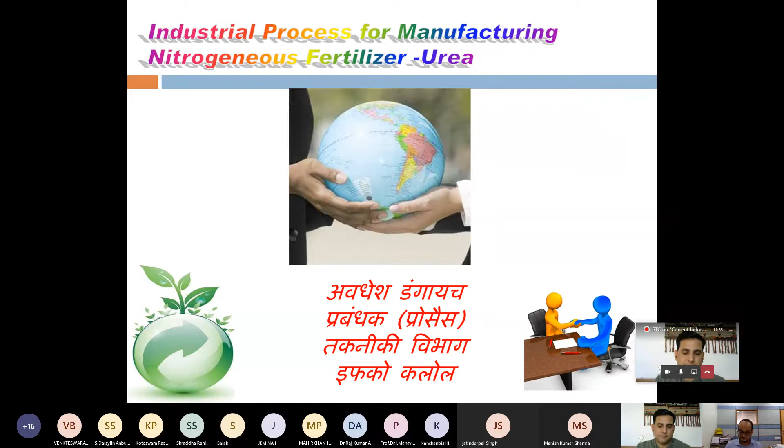The content of the presentation - I would like to give the general introduction of my industry. Once you are going to manufacture urea, you will get a buy-one-get-one chance - if I am going to tell you about manufacturing urea, I also have to tell you how to manufacture ammonia, because in the case of urea, everyone knows that 2 moles of NH3 react with CO2 to give urea plus a water mole. So for urea itself, my raw materials are CO2 and ammonia.

Now, where does the ammonia come from? In each and every urea plant, there is also an ammonia manufacturing plant. So before going to the urea plant, we have to talk about the ammonia plant also. So now I am going to the general introduction, then the manufacturing process of the ammonia plant, then the manufacturing process of the urea plant. Then I have to go for the major current status of the fertilizer industry - what is happening and what is the future of the fertilizer industry, especially in India.

So in our IFFCO, if we see the manufacturing units of IFFCO and joint ventures in India, there are 5 plants: 2 in Gujarat, 2 in Uttar Pradesh, and 1 in Odisha only. I am working in the Kalol plant, and Kandla, Phulpur, Aonla and Paradeep are also there.

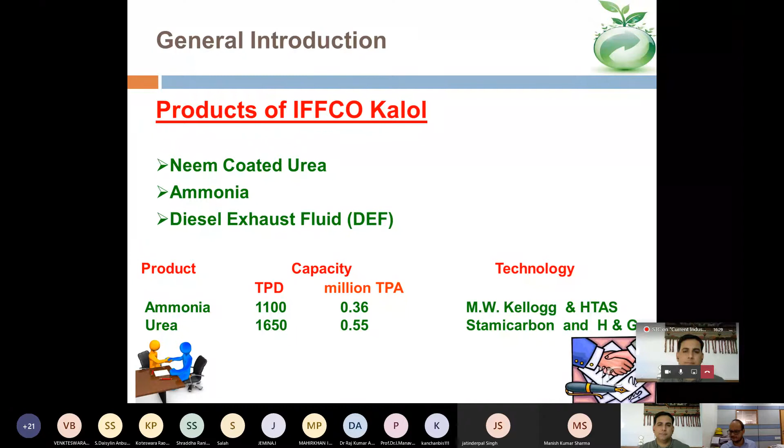The products of IFFCO Kalol plant are neem coated urea, ammonia, and just recently we have introduced diesel exhaust fluid, DEF. Our present capacity is 1100 and 1650, and the technology provider is MW Kellogg and Stamicarbon. So this much is only for my company profile, and now we are going to...

Mr. Avdesh, just to know, is this Kalol near Vadodara location? Yes, Vadodara only, it is near Ahmedabad only. Okay, in between Vadodara and Ahmedabad, right? No, in between you can say Mehsana and Ahmedabad. Okay, because I know Halol and Kalol are both in that area. Halol is different and Kalol is different. So you are located in Gujarat. Gujarat, yes sir. Okay, thank you sir.

So now we are going to tell about how we make ammonia only. Let me tell you this reaction from the 12th standard: nitrogen reacts with 3 hydrogen to give 2 moles of ammonia only. I am not going to tell you very much technology regarding this, but from the 12th standard if we see this reaction, and now discuss how it is manufactured, you will see that this simple reaction, how it is going to manufacture, is very good to see now. So by the reaction we can see that the raw materials which we require are nitrogen and hydrogen.

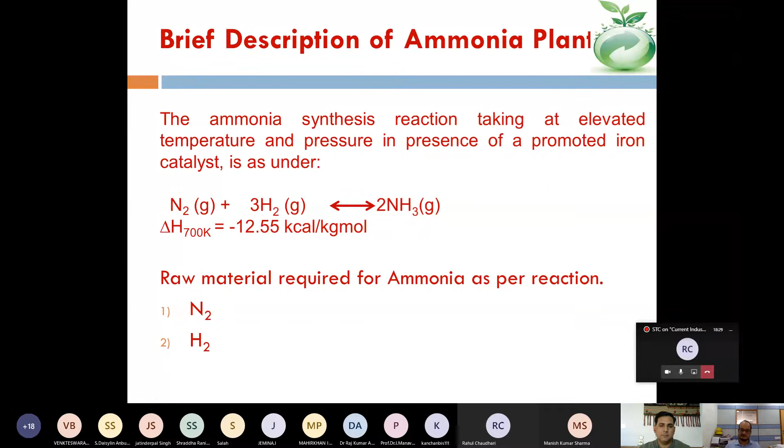Nitrogen and hydrogen. Before going to any raw material selection, because nitrogen and hydrogen both are the raw materials for my ammonia plant, ammonia only.

So first, what do I have to see? Cost of material. Anything we are going to make, the first thing that comes is the cost of the material. Our raw material should always be cheap. Material properties, form of the material, whether the material is toxic, and rules and regulations. Rules and regulations come in the government sector; there are many things which we have to import, and many rules and regulations such that we are not able to directly import some raw materials. But our overall motto is that whatever raw material we take, our cost of energy and cost of production should always be less.

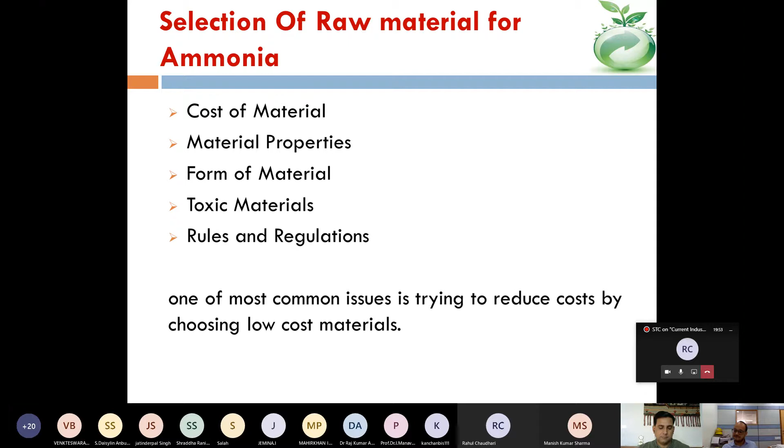That is our main motto before producing anything, before designing any plant, and before designing any process. Our main issue is how to reduce the cost of raw material and the cost of technology, so that our cost of production will reduce.

So while going for the raw material, we know that the source of nitrogen is air, since 79% by volume of air is nitrogen. And the source of hydrogen we consider as hydrocarbons - we can consider natural gas, naphtha, and coal.

Water, I have slightly struck out, because in the case of water we cannot directly utilize it, since breaking water into its two components, hydrogen and oxygen, is a very energy-intensive process. So we cannot use water directly, but indirectly we are using water also to produce hydrogen, which I would like to tell you later on.

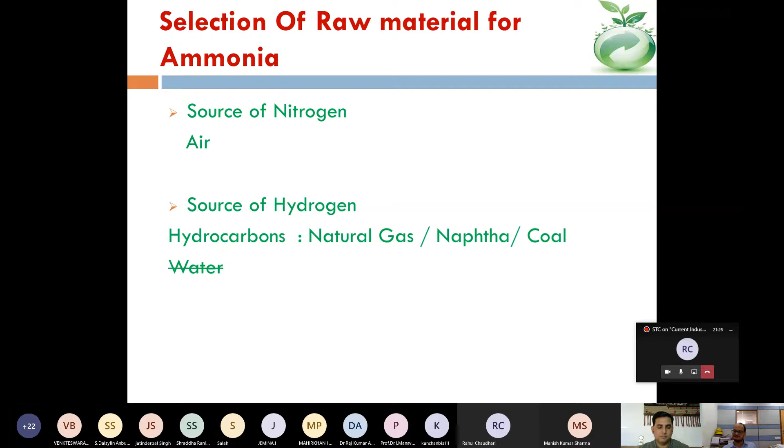So my source for nitrogen is air. For hydrogen, I am using hydrocarbons - natural gas, naphtha, and coal. At present we are utilizing natural gas. Previously we were using naphtha also, but later some regulations came from the government, and we have eliminated the naphtha section from our plant feed.

So the process for ammonia production - while we go to produce ammonia, there are 7 levels.

Can't we use direct hydrogen for this? Means like the hydrogen which is produced at chlor-alkali plant, caustic chloride plant. Can't we use that hydrogen directly? You can use direct hydrogen if you are getting it at a cheap rate, but the purity should be very good.

And the other thing is, while making urea, you also want the carbon component. For the carbon component, I use hydrocarbons only. But if I get CO2 from somewhere else also, then that is also good for me.

So before manufacturing ammonia, the following operations and processes are involved. First is desulfurizing of the natural gas and naphtha. Second is pre-reforming and reforming. Third is water gas shift reaction. Fourth is CO2 absorption and stripping. Fifth is methanation. Sixth is ammonia synthesis. And seventh is refrigeration. In between, so many utilities are there which I am not going to tell you about, because that process itself would be very big and become very lengthy.

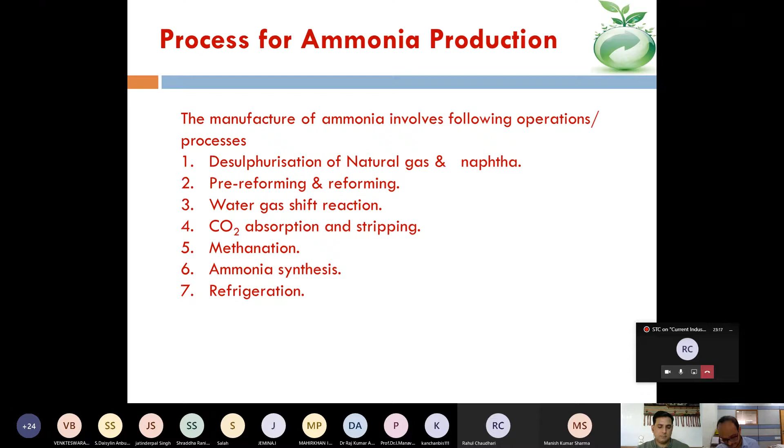Am I right, sir? Yeah, you are right. It was there actually, but unfortunately the speaker Nitin Mittal got corona positive, so he is taking rest. So at this place, Mr. Amit Verma from Dow Chemical will give the talk.

So there's a question from Aditya Matare - he wants to know, since we get nitrogen from air, is there any instrument in which air is brought and then some process is done to get the nitrogen? No, we can directly get it from there, because so much air is there, we just have to compress it.

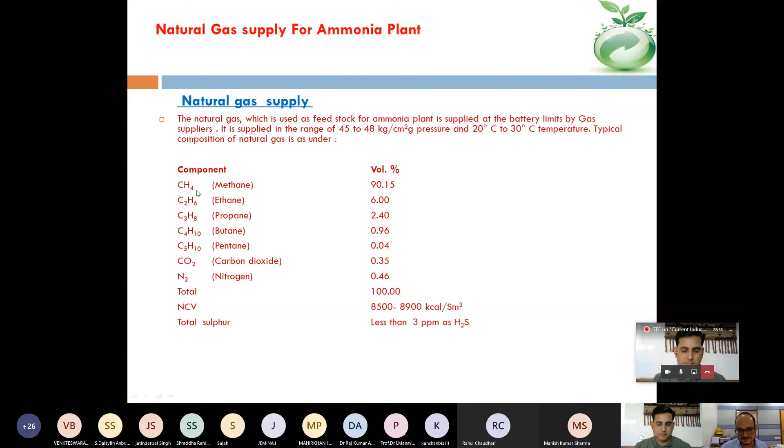So removing sulfur we call desulfurization, a process which employs absorption and adsorbent using activated carbon. There are two processes in the industry: one is activated carbon, and another is hot desulfurization by catalytic reactor, which uses SDS catalyst. The purpose is to remove sulfur from the process stream.

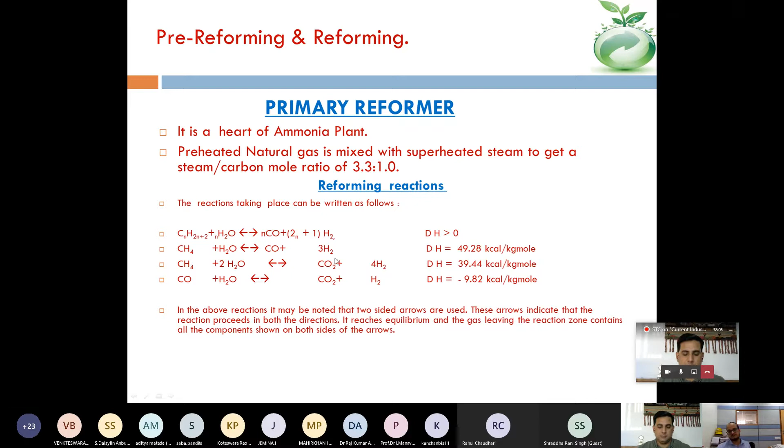In the above reaction, it may be noted that the two-sided arrow means both reactions will occur and can proceed. If this reaches equilibrium, the gas leaving the reaction zone contains all the components shown on both sides of the arrow. So what is our motto here? To get hydrogen and CO2. But in the case of CO2, we are getting CO also.

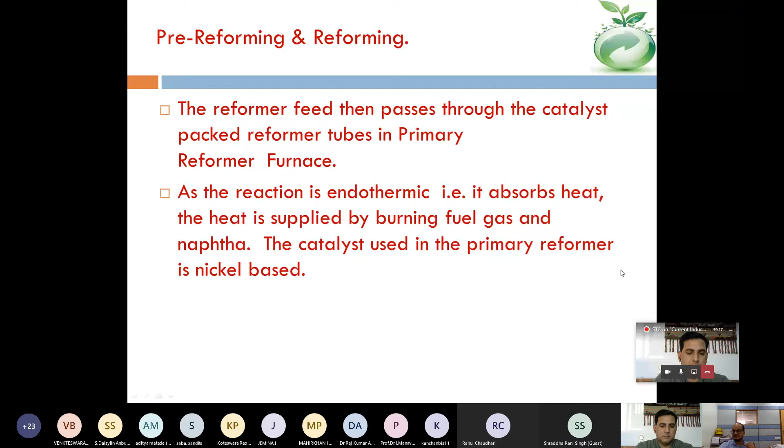The reformer feed then passes through the catalytic packed reactor, where the catalyst is a nickel-based catalyst, and this whole reformer is a furnace. In the reformer furnace, the temperature of the flue gas side, that is the furnace side, is around 1100 degrees centigrade. In the reformer tubes, in the reforming section, we enter this process stream at around 525 degrees centigrade, and since it is an endothermic reaction, it absorbs heat. After the reaction, when the process stream comes out from the primary reformer, the temperature is around 780 degrees centigrade. This reaction is endothermic, it absorbs heat, and that heat is supplied by burning fuel gases and naphtha.

So this is primary reformer and reforming.

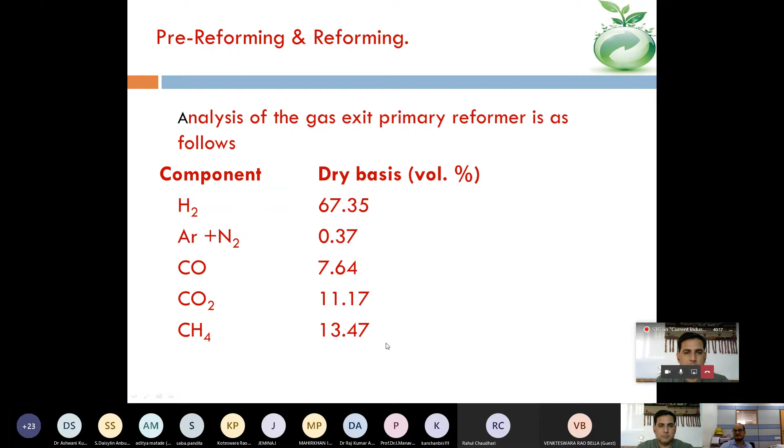In the case of primary reforming, the gas analysis at the exit of the primary reformer shows hydrogen around 67%, nitrogen 0.37%, which comes from our natural gas also, CO at 7.64%, CO2 at 11%, and methane, because no process is 100% conversion. Nothing is like that. So even unreacted methane is present, which we have to process in another section, called secondary reformer.

So from here we came to the primary reformer section outlet, and from there we are going into the secondary reformer, where the process air also comes in. Partially reformed gas from the primary reformer enters the secondary reformer at a temperature of around 780 to 797 degrees centigrade, along with preheated process air gas.

The air present in the atmosphere is compressed to around 32 kg per square centimeter. Since the stream coming from the primary reformer is at 797 degrees centigrade, we cannot directly introduce cold air into the reactor. So after compressing it in the compressor, the temperature of the air is approximately 200 degrees centigrade, and then it is further heated in the furnace using the flue gas, reaching around 447 degrees centigrade.

We introduce this into the secondary reformer, which is also a kind of air mixer. From the air, we get nitrogen and oxygen. We use the nitrogen that is useful for our reaction in further processes, and the oxygen is utilized here for combustion only, because as I already told you, making H2O gives a lot of energy, and breaking H2O is very energy intensive. So whenever hydrogen is burnt with oxygen, that is a highly exothermic reaction.

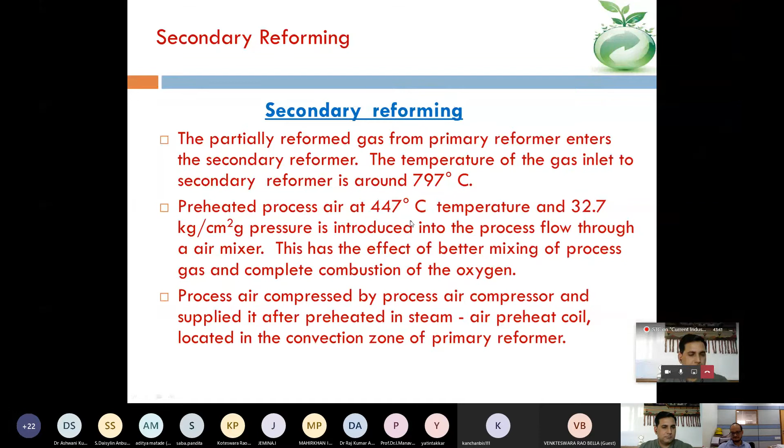So what is happening in the secondary reformer is that hydrogen reacts with oxygen, giving steam, and of course nitrogen remains the same, and it gives off very extensive energy. In the previous case, in the primary reformer, we have seen we are utilizing a furnace, but here we are not utilizing any furnace, because our overall motto is how to get CO2, CO and hydrogen. Hydrogen is burning with oxygen, giving steam, and that steam or oxygen will react with methane, which is coming from the previous section also, and convert into CO2 and CO, and of course hydrogen.

This is also a nickel-based catalyst reactor only, but in this case the temperature of the bed will be around 1235 degrees centigrade. You can understand that from 782 degrees centigrade of process steam which is coming from the primary reformer, and the other air which is coming at 447 degrees centigrade, and the energy which is coming from here - this reaction is so extensive that the steam temperature and the reactor temperature become 1235 degrees centigrade.

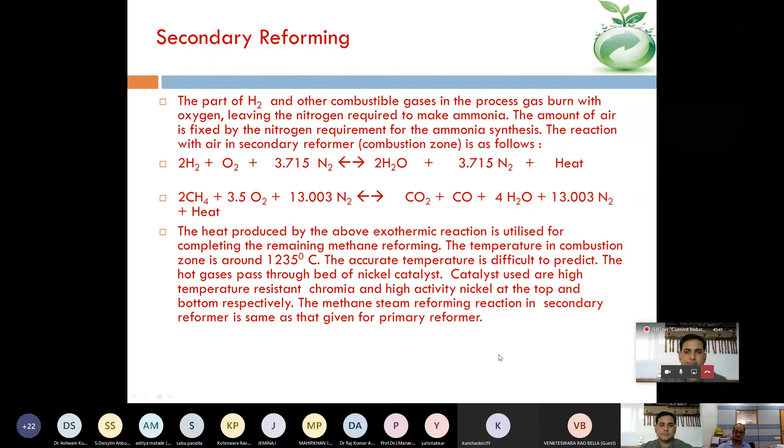So what we are doing here is secondary reforming only. Secondary reforming - we are proceeding with the reforming reaction for CO2, CO and hydrogen. The temperature of the gas exiting the secondary reformer will be 961 degrees centigrade. The catalytic bed temperature is around 1200 degrees centigrade, but here the reaction is endothermic - steam reforming - so the temperature will come down to 960 degrees centigrade.

From 961 degrees centigrade, if I proceed to another section, which is the shift reactions - for the shift reaction, the temperature requirement there is around 380 degrees centigrade, but the temperature here is 961 degrees centigrade. So we have a series of waste heat boilers, and from there we are producing steam, which is utilized for our turbines - various turbines, syngas compressors, process air compressors, refrigeration compressors, and many ID fan turbines. So many turbines are there.

So whatever temperature we have in between - say, boilers, which are the primary waste heat boiler and secondary waste heat boiler - from there we are reducing this temperature from 961 degrees centigrade to 380 degrees centigrade, and the composition which leaves from here is as follows: it is around 56% hydrogen. If you see in the previous case, in the primary reformer section, the hydrogen percentage is around 67, but here the hydrogen percentage is reduced.

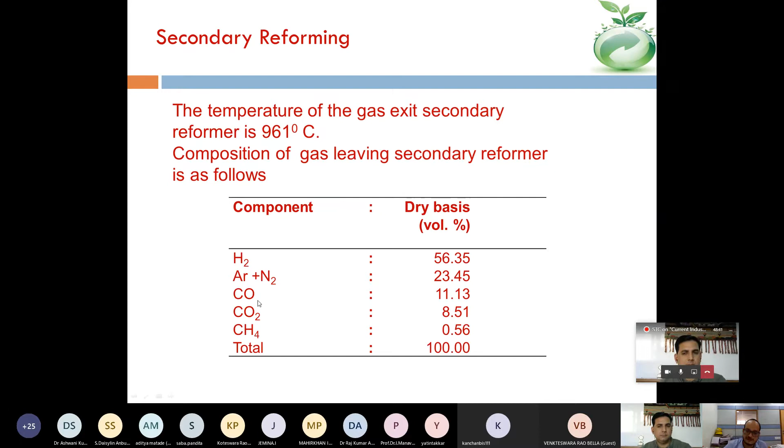You can see here there is carbon monoxide and carbon dioxide also. We don't require carbon monoxide - our requirement is only carbon dioxide. So the further process which we are going to deal with is shift conversion. Shift conversion is where we are going to convert this carbon monoxide into carbon dioxide. So from there, from the secondary reformer, we are going into the shift converters.

So this is the basic reaction of the shift converter. In the shift reactor, it is also an exothermic reaction - that means if the exothermic reaction is there, it will always favor low temperature only. But I already told you, the process stream which enters into the shift converter is around 380 degrees centigrade, and 380 degrees centigrade is a very high temperature. So in this case, it is an exothermic reaction, and we can see here there are also 2 moles, and here also 2 moles - so from here also, from steam also, we are getting 1 more mole of hydrogen only.

So this reaction is also reversible, and carbon monoxide is converted into CO2. There are 2 stages in this shift converter also - first is the high temperature shift converter, and the other is the low temperature shift converter. In the high temperature shift converter, it reacts around 380 degrees centigrade to 422 degrees centigrade at 31 kg pressure, and it contains approximately 1.8 to 2.8% CO.

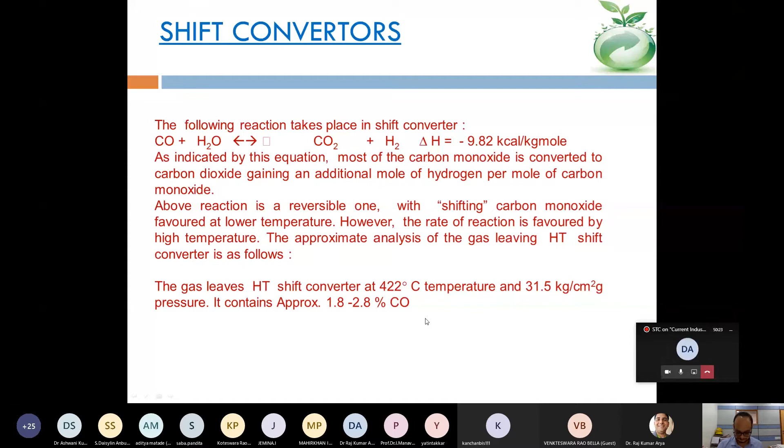So there is LTS and HTS, and we can see in the process stream, HTS is there, that is the high temperature shift converter. There is a series of exchangers, and after that an inlet separator, it goes to the LTS, or the low temperature shift guard. Then it again goes to a series of heat exchangers. Because it is an exothermic reaction, we are just losing heat in the heat exchangers, so that we can get towards the equilibrium conversion.

Then again it goes to the LTS, low temperature shift converter, and again we have to go for a series of heat exchangers and boilers, the boilers only. And after this, all CO is converted into CO2. Very minor CO will be there only in it.

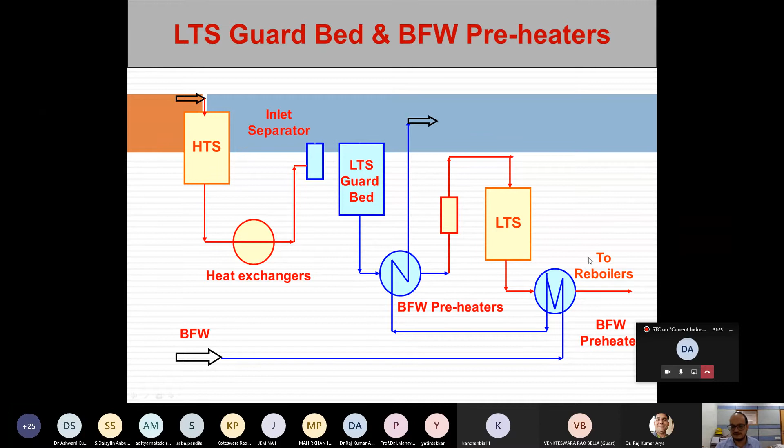So we can see in the high temperature shift conversion, the reformed gases enter into the high temperature shift reaction and react. So the overall basic purpose of this shift converter is CO is converted into CO2. For the high temperature converter, we are getting the benefit because for any reaction we have to get some activation energy, and the rate of reaction is also very much dependent on temperature. If the temperature rises, the rate of reaction will also rise.

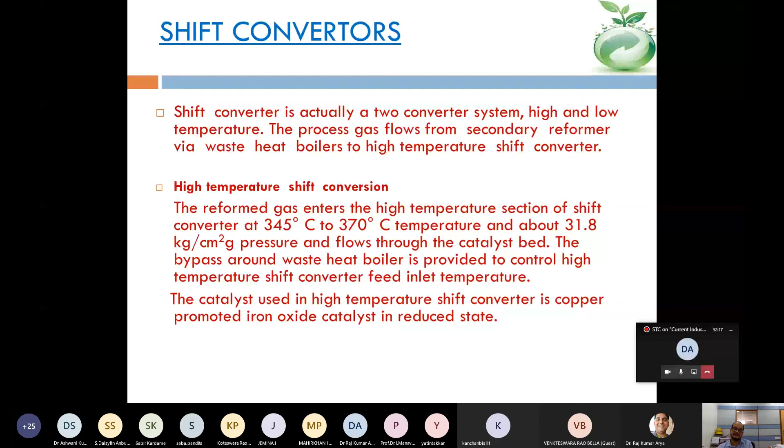So first, in the high temperature shift converter, we are getting the benefit of the rate of reaction. Then if we want to proceed toward the equilibrium conversion, we have to go for the further low temperature shift conversion, which works around 200 to 220 degrees centigrade, and 240 degrees centigrade also if the catalyst is old. These are all catalytic reactors.

So from the shift converter, we have converted all CO to CO2. Now if you see in this stream, we have nitrogen, hydrogen, a little bit of methane, and CO2, and very minimum CO only. So our next process, if we are proceeding for ammonia manufacturing, is that we have to remove CO2.

So, carbon dioxide removal. We have to remove the carbon dioxide from the process stream. This is achieved by absorption. So we have a very big absorption column, a CO2 absorber, and the absorption reaction is always favored by high pressure and low temperature.

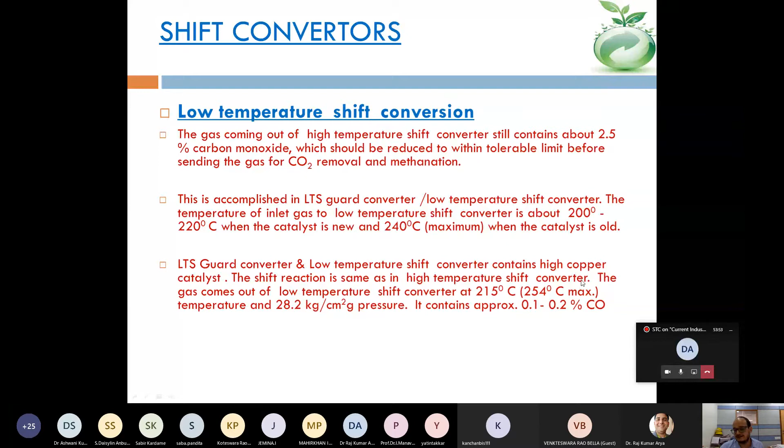At high pressure, the reaction occurs around 32 kg pressure. But if you see later, the temperature is around 250 degrees centigrade. So it is further reduced by a series of heat exchangers, and the reaction occurs at 60 degrees centigrade.

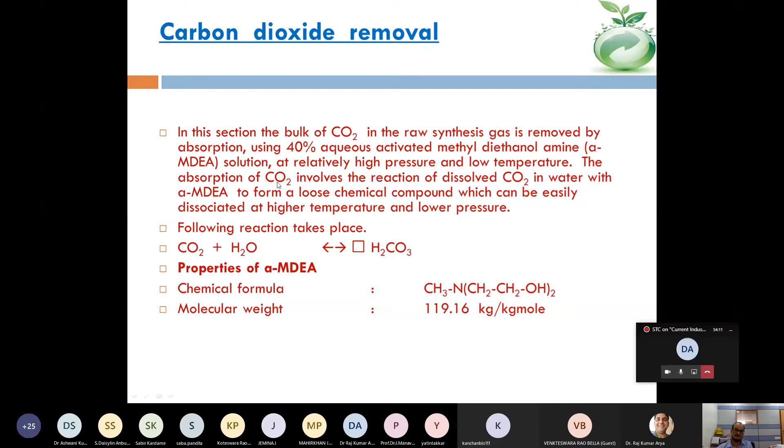So the absorber solution which we utilize is activated methyl diethanolamine, which is utilized for the absorption of CO2. There is a counter current flow.

So there is a two-stage MDA system in which first we utilize it by reducing the pressure. That means whenever a high pressure stream goes to low pressure, or if the pressure is reduced, then the dissolved gases will just evolve from it, meaning the dissolved gases will come out from this stream.

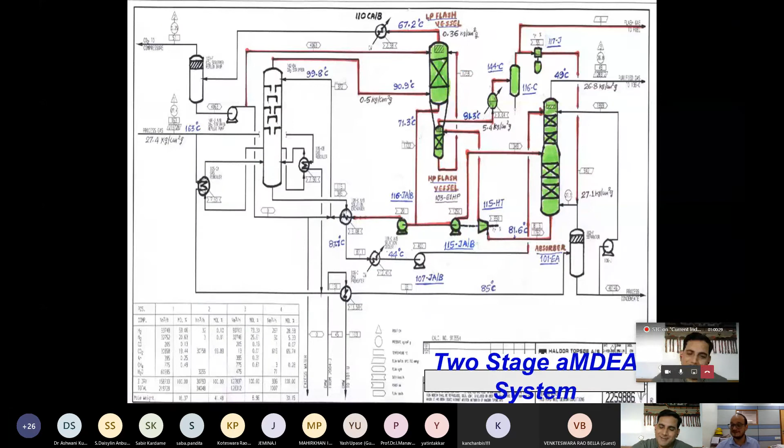The process is very big, sir. If I will tell about all these things it will take a lot of time just for this process. Yeah, I know, I can understand. So you can manage it.

So from CO2 removal, CO2 is sent to the urea plant. Now in this stream we mainly have nitrogen, hydrogen, and very minimal CO2 and CO. You can see here in the methanator the component is hydrogen 73%, argon and nitrogen 25%, and CO and CO2 is very less, in ppm.

As I already told you, this CO and CO2 is very poisonous for our further process. So what we have to do is convert this CO and CO2 into CH4, which is inert in the case of ammonia reaction. It doesn't take part in the ammonia reaction. So we will convert it into inert methane in this case.

For ammonia synthesis we need a very pure gas mixture of hydrogen and nitrogen - you can check the ratio, it's around 3:1. Nitrogen we put in higher amount because whichever is the limiting reactant, in this case hydrogen, is what we are producing from primary reformer, shift conversion, and secondary reformer. Nitrogen we have in abundance, so since hydrogen is the limiting reactant, we put excess nitrogen so that we get more conversion.

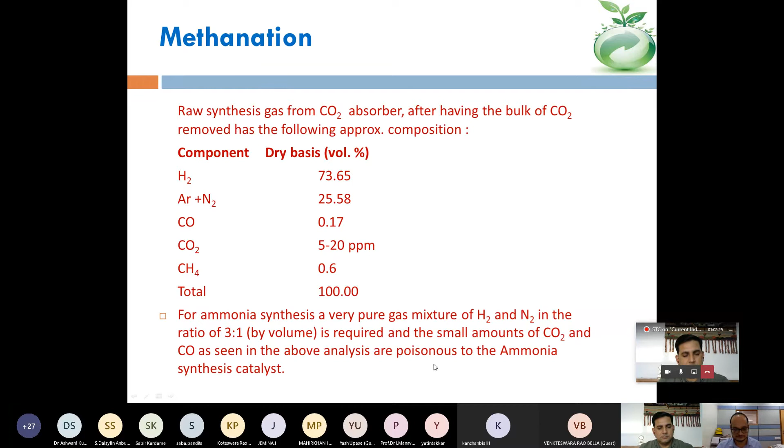In the methanation reaction, it is just the reverse of the steam reforming reaction. In reforming reaction, we utilize methane and steam convert into CO and CO2 with hydrogen. Here we are just reversing the reaction - CO and CO2 reacts with hydrogen, gives methane and steam only. This is also a highly exothermic reaction.

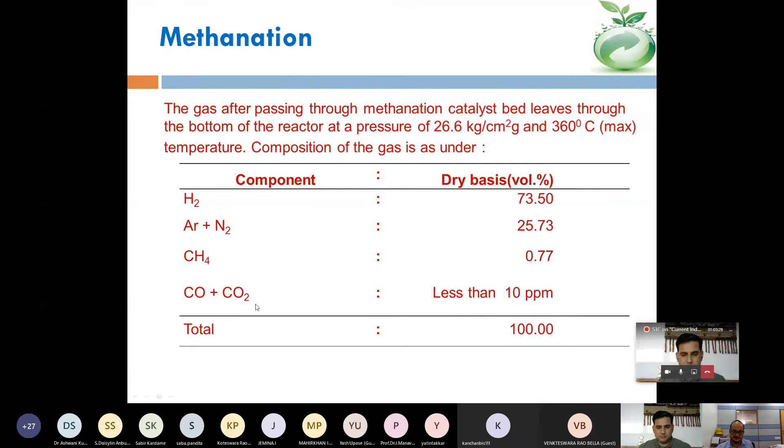The temperature is around 300 degrees centigrade. Before compressing it, as I already told, if the temperature is high then the volume will also increase. So for further reaction, as you can see here in the methanation, the hydrogen percentage is 73%, 25%, and CO and CO2 is now very less, around 10 ppm.

Now from the methanator, there are suction chillers, suction exchangers, a series of heat exchangers, which are basically to reduce the temperature of this process stream going to the syngas compressor. In any compressor, if the inlet temperature is less, the volume is decreased, giving more volumetric efficiency if we reduce the temperature in the process stream. So here, by introducing makeup gas in the syngas compressor, the temperature becomes 4 degrees centigrade, from 300 down to just 4 degrees centigrade.

So now we are coming to the main ammonia synthesis. As I already told, nitrogen reacts with 3 hydrogens to give ammonia, 2 moles of ammonia. As we can see, there are 4 moles of reactant gas versus 2 moles on the product side, so it favors high pressure. This is an exothermic reaction, so the lower the temperature, the more the conversion.

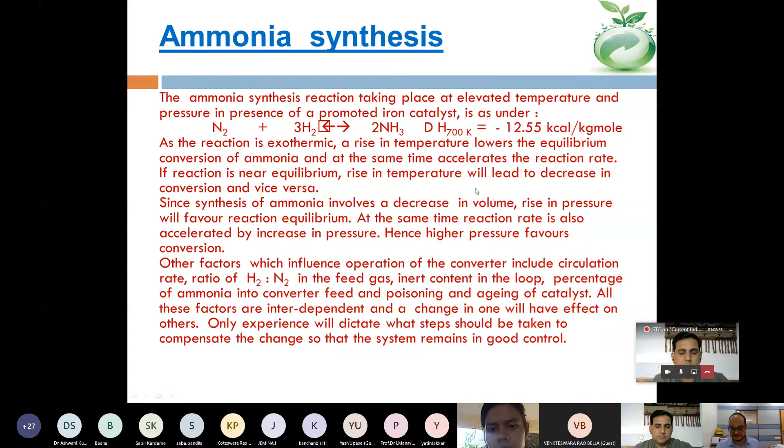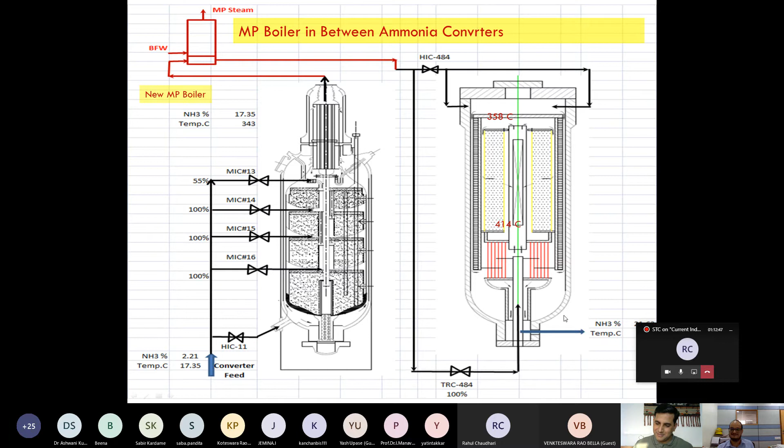Okay, so I think I have to go fast now. So here ammonia is formed, and the next section we are going to deal with is purification of this ammonia.

The purification is done by a refrigeration system. I already told you the temperature is around 390 to 395 degrees centigrade at the outlet of the converter. So from 395 degrees centigrade, we have to go down to around 28 to 30 degrees centigrade to separate out the ammonia. It goes through a series of heat exchangers, which we can call boilers, since a boiler is also one form of heat exchanger. BFW preheater, coolers, chillers - only the names differ, all are heat exchangers only.

The gases are cooled up to minus 28 to minus 30 degrees centigrade, and then go to the ammonia separator where ammonia is separated out. This separated ammonia is utilized in two different manners. First, the refrigeration section - the primary purpose is to make refrigerant ammonia available, because in chillers we are utilizing ammonia only, so we condense the ammonia by ammonia itself using its latent heat. So the purpose of the refrigeration section is only to purify and condense the ammonia.

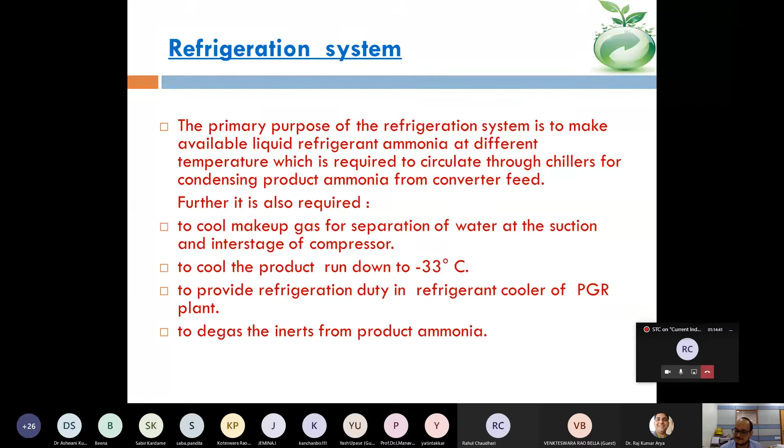From 130 kg per centimetre square, it is let down to 70 kg per centimetre square, and at 70 kg most of the dissolved gases will be flushed out from it, and the product ammonia is sent to the urea plant. The product of this stream, meaning ammonia, we send to ammonia storage tanks in case the urea plant is shut down.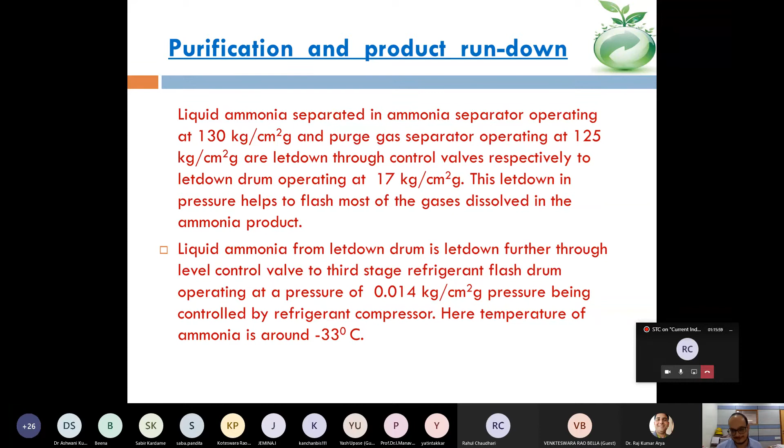If the urea plant is running, we directly send it at 70 kg, at around 40 degrees centigrade, to the urea plant only. In case we have to send it to ammonia storage, we have to further let down the pressure and reduce the temperature also. So this is the purification and product rundown only - the main purpose of this purification is how to give ammonia to the urea plant only.

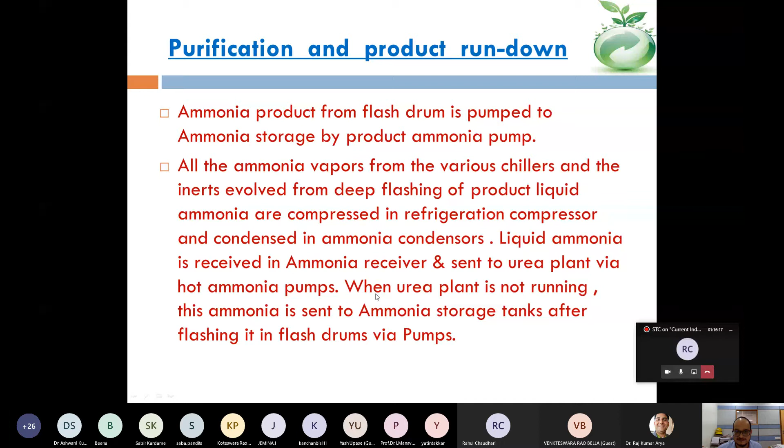So now something is coming in the purge gas system. If you see in the syn loop, that means in the ammonia formation loop, what is happening is we are adding methane also as an inert. If we introduce methane and take ammonia out, the concentration of methane in the loop will increase.

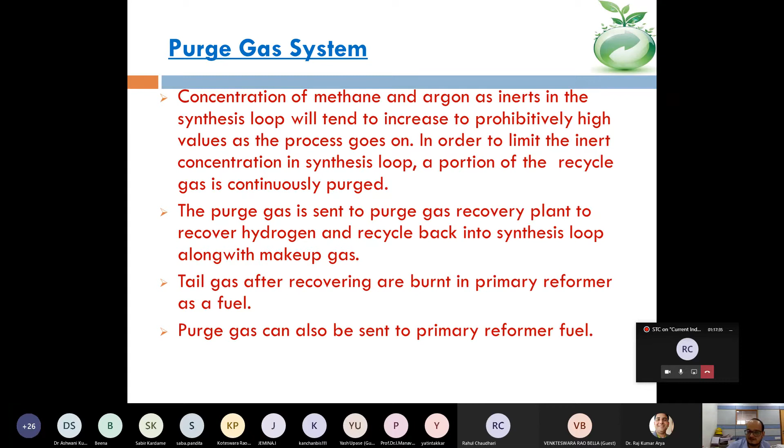If the concentration of inert increases in any loop or stream, we require more pressure and the conversion will also reduce. So just to reduce it, we are purging it out from this loop. In the purge gas system, they have methane, so to limit the methane we are purging the system. But ammonia and hydrogen are also there, so there is a separate purge gas recovery system in which we get hydrogen and ammonia back to our system.

So this is overall the ammonia plant, starting from LNG, desulfurizing, reformer, secondary reformer, then shift converter, where we convert CO into CO2. CO2 is not useful for the ammonia plant, so we remove it from here and send it to the urea plant. The traces of CO and CO2 are converted into methane, which is inert for the syn loop. After the syn converter we take out ammonia, and whatever gases remain are sent again into the syn loop. This is the purge gas, and from the purge gas recovery system we get hydrogen back, which is sent into the syngas compressor. So this is the overall brief description of the ammonia plant.

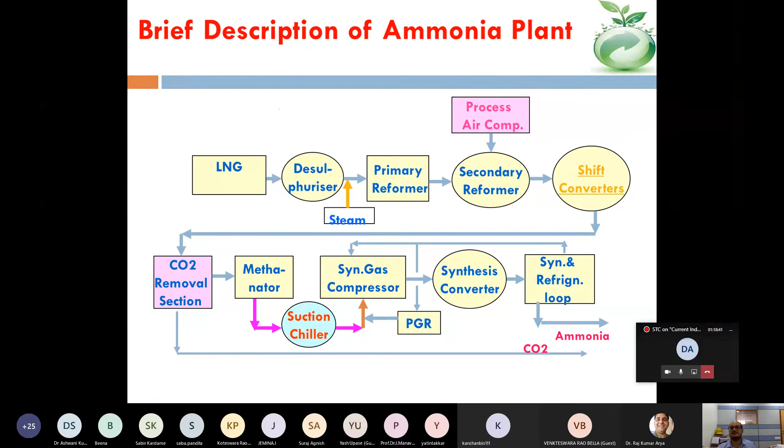So now we are going to move to the urea plant. Any question, sir?

It's going well, we are getting a good insight of the plant actually. We are the officers, sir, not very good at presentation, but we are getting very good insight of what happens. But let me tell the students connected in this forum, it's all about energy balance and material balance, nothing more than that. Also, we are doing energy and material balance only. It's very good, continue, okay sir.

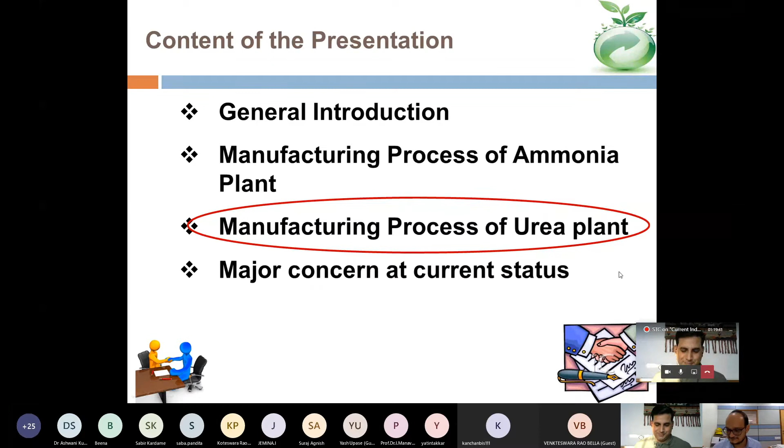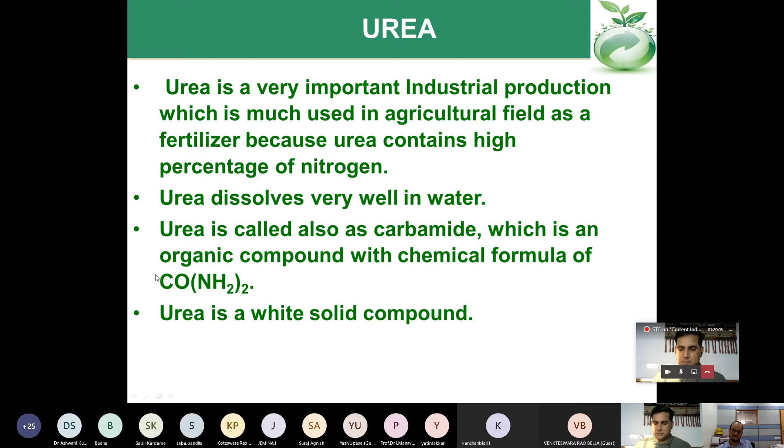Before going into the urea plant, urea is a very industrial process. This is only the basic information of the urea plant. It is used in the agriculture field as fertilizer. Urea is also called carbamide, and the formula is CO and NH2. So you can see from here, we require 1 mole of CO2 and 2 moles of NH3.

So this is the urea plant reaction. You will see that our raw material is ammonia and CO2 for manufacturing urea fertilizer. Urea is produced by reacting liquid ammonia and gaseous CO2 at 180 to 185 degrees centigrade and 145 to 155 kg pressure. So you can see the severity also here.

Ammonia itself is a hazardous compound, even in ppm it is very dangerous to life. So you can see the severity of this process, that we are dealing with ammonia, dealing with hydrogen, dealing with very elevated temperature, and dealing with very high pressure.

So the process chemistry, as I already told you, is that 2 moles of NH3 react with CO2 to give urea and 1 mole of water. After the formation of urea, the whole process is about removing this water only. Getting to 50% mass is very easy, but once it's 70% it's more tough, even at 90% it's more tough, and getting to 92 or 99% will be even tougher.

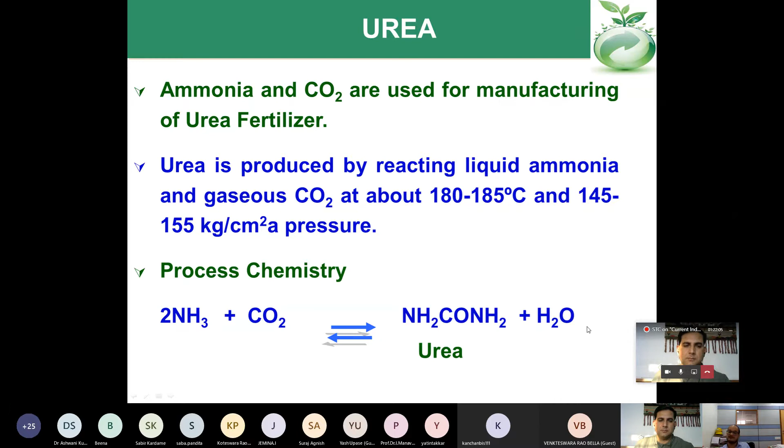So the formation reaction is this: first is ammonium carbamate formation, which is an exothermic reaction. After that, the carbamate is dissociated with the help of heat, giving urea and water - this is an endothermic reaction. So formation of the carbamate doesn't require heat, but formation of urea requires heat. Overall, the reaction is exothermic.

There is also some biuret formation in another form, because we don't want biuret, but if the process parameters are diverted, then some biuret is also formed.

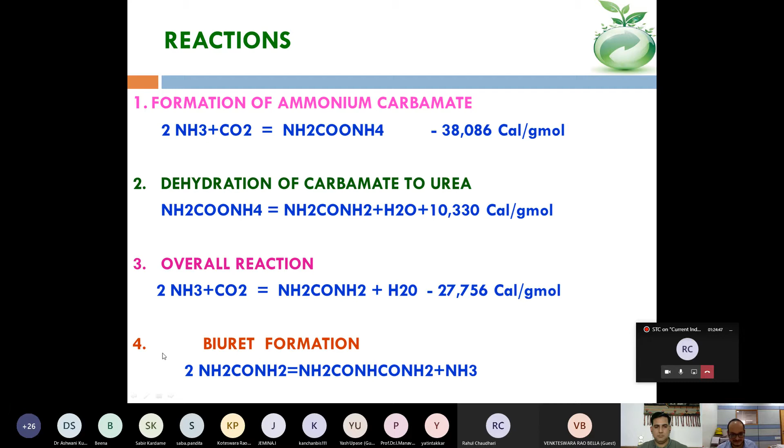So by the norms of the Fertilizer Control Order, our norm is that biuret should be less than 1.5%. This is an undesirable product of this reaction.

This process looks very simple in this case, but if you see it in the actual plant, in the complex, you will forget about this simple version because the real process is something else.

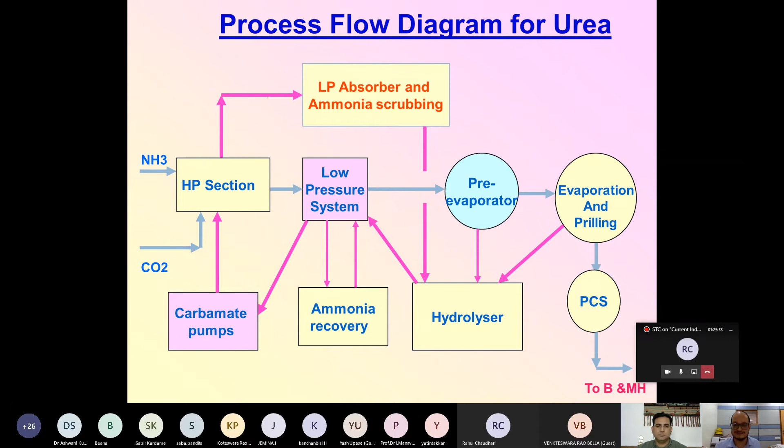So the process of urea production follows these steps: ammonia and CO2 supply and CO2 compression, then the synthesis section which we call the HP section. These two sections are related to the LP section, in which evaporation and prilling - that means removing water - occurs, and the LP carbamate is recirculated back into the system. Then there is the prill cooling system, the neem-coated urea system, and of course in ammonia there is also the steam and condensate system, and the hydrolyzer stripper system.

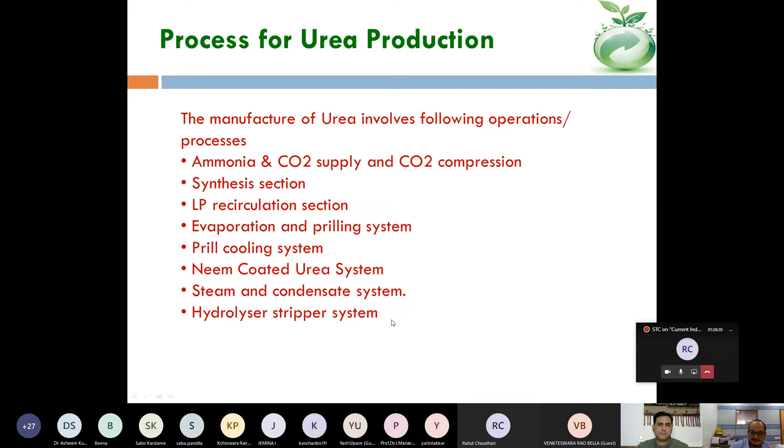So this is the overall flow sheet of the urea plant. This is the HP section. This is the LP section, the LP recirculation system. Then it comes to the evaporation section, then it goes to the prilling section.

And I think I am unable to see... You can see this full picture. Hello, sir. Okay, no problem. Yes, this process flow diagram you are talking of? I am telling about the process because I am unable to see this side. This PFD I can see - the PFD diagram for urea I can see. This is the only slide displayed to me now.

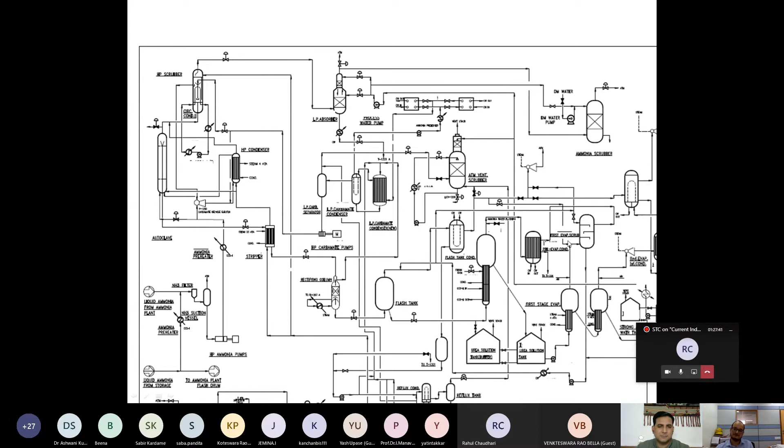Okay, so there is ammonia and CO2 supply and CO2 compressor. From the ammonia plant we are getting it at 40 degree centigrade temperature and 20 kg pressure.

In some cases, during startup of the ammonia plant, we are getting CO2 but not able to get ammonia supply from the ammonia plant, so we get ammonia from ammonia storage tanks also. It is pumped by the HP section - you can see that 20 kg pressure is there, and it is pumped up to 150 kg per centimeter square. And CO2 supply, yes.

There's a question from one of the participants: is there any application of biuret?

No, there is no application of biuret. So will this go completely to waste? No, it will not go to waste entirely - you can say it goes through the raw material, urea, because once it is converted into urea, that urea contains around 1% or 0.8% biuret also.

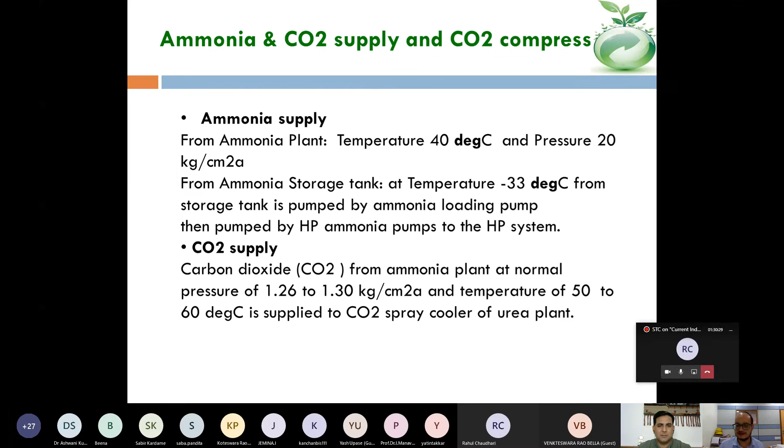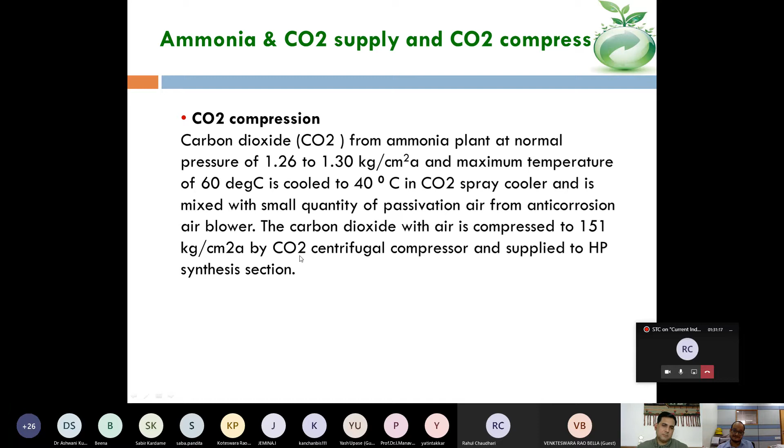Okay sir, then the CO2 compression. CO2 which comes from the ammonia plant is around 1.2 to 1.3 kg, and the maximum temperature is around 60 degrees centigrade. As I already told you, for any compressor in the suction, we have to cool down as much as we can, so that the compressor efficiency will be increased. So from 60 degrees centigrade, we are cooling down into 40 degrees centigrade, and this carbon dioxide with air is compressed around 151 kg, and the temperature is around 180 degrees centigrade by the CO2 centrifugal compressor and supplied to the HP synthesis section.

In this synthesis section, we can see we have four vessels: HP condenser, autoclave, HP scrubber, and HP stripper. This is HP stripper, this is HP condenser, and HP scrubber, and this is autoclave.

But now you can see the beauty of this full system. There are so many heights in the process - the HP scrubber is at the top, HP condenser is here, autoclave is here, and HP stripper is here. If you see this beauty, for the whole hydraulics, the process flow of process streams going down occurs only because of the hydraulics. There is no pump here - you can see this in the process stream.

So this 150 kg, if it gets processed to here, then some flow will occur and it will be condensed. So why don't we have a pump - is it due to some constraint, or does it not require one? We cannot put the pump because it doesn't require it - we require only head, gravity flow head. We require only head, and because of this vessel's height, we get that much head for circulation in this HP system.

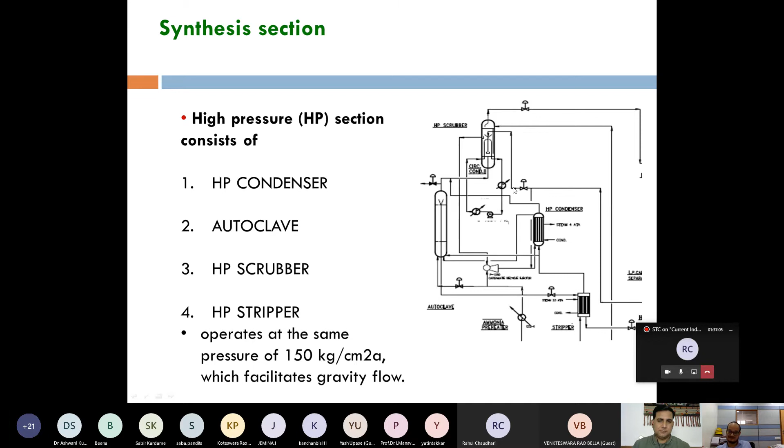Okay, I see. It is very complex, sir. Once any flow will be disturbed, then it is a very big headache for us, sir. Stabilizing the flow here only is a very big role, sir. You are taking care of delta P's. Yes, we are taking care of the delta P's.

So this is also the flow diagram. In the synthesis section, liquid ammonia goes to the HP carbamate condenser and autoclave, and CO2 goes to the HP stripper, where it is counter-currently contacted with the liquid effluent of the autoclave. That means the liquid effluent which is coming here, and CO2 is coming from here.

For stripper, I already told, for stripping we require energy for the endothermic reaction. So 23 ata steam we are introducing here, which is converted into the condensate, and then whatever the latent heat of the 23 ata is heating the ammonium carbamate solution and favoring the urea formation.

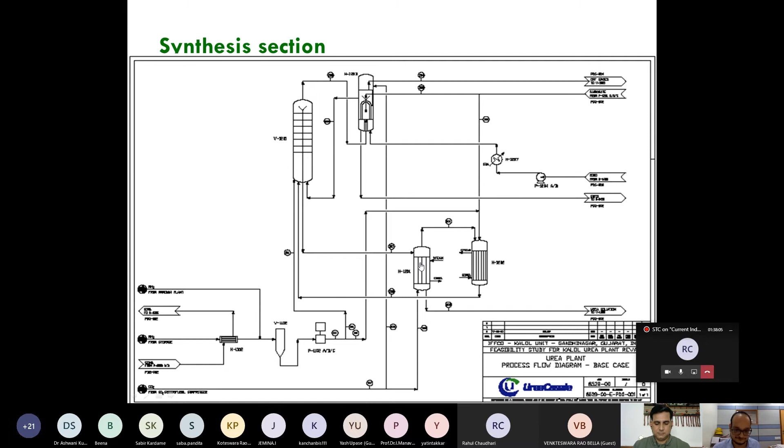And liquid from the bottom of HP stripper goes to the LP recovery section, and vent gases from the HP stripper are condensed in the HP carbamate condenser with the help of ammonia and carbonate solution. And 23 ata is used for stripping in HP stripper, and 4 ata steam is generated in HP condenser.

Just I already told you, sir, that overall reaction is an exothermic reaction. So in HP condenser we are generating the steam, and in HP stripper section we are using the 23 ata steam.

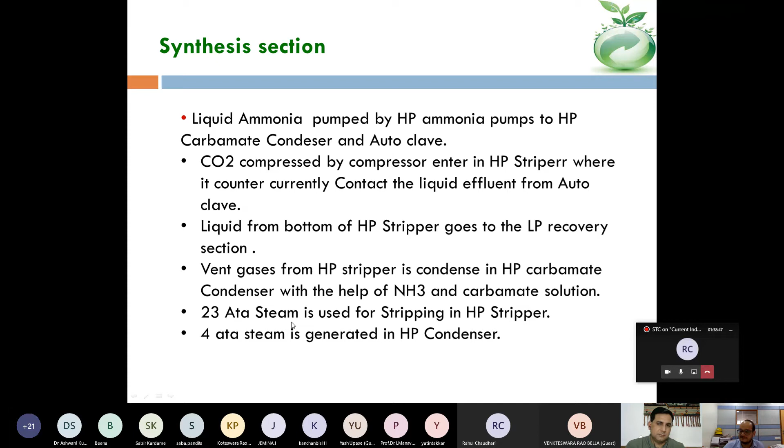Once the carbamate solution is in HP carbamate, then it goes to the autoclave, and autoclave is a reactor. So the main conversion of urea from ammonium carbamate to urea happens in the autoclave only. From there it is around 30%, and in stripper it will go up to around 50%.

So the conversion of carbamate to urea is achieved during the residence time of 1 hour. So as much as we give the residence time at 180 degrees centigrade, the more will be the conversion. But we cannot give so much time there in the autoclave only, because it favors biuret formation also. So we have to maintain some residence time there only.

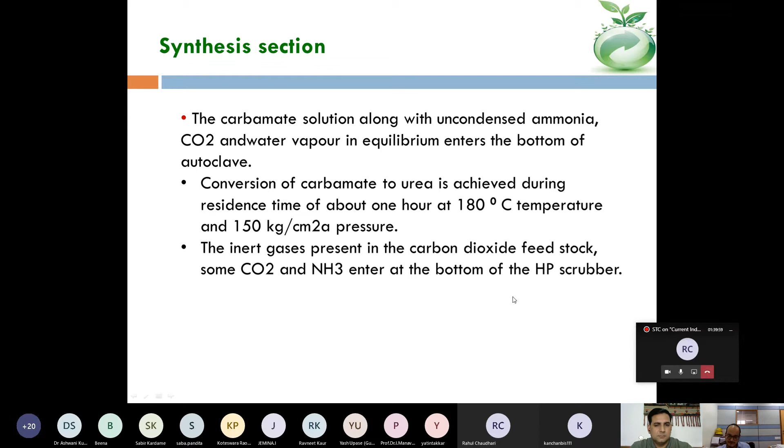So in the LP recirculation, now you can see from 150 kg pressure, we are letting it down from 2.8 kg to 3.3 kg. Okay, from 150 kg to 2.8 kg. So most of the ammonium carbamate, from HP stripper around 50% conversion we achieved in the urea.

So most of the ammonium carbamate is converted into ammonia and CO2 again, and it is sent to the rectification column. There are so many flash tank separators and condensers. There again we are condensing all of the ammonia and CO2, forming ammonium carbamate, and then we are sending it back to the HP loop, that is HP stripper.

So the temperature of the solution drops from 120 degrees centigrade, and again it is heated up. Heating is required, then it is sent to the flash tank separator. Again we are reducing the temperature and pressure, and after reducing the pressure, the dissolved gases flash out, and these gases are recovered to the LP recirculation system and LP condensers and LP absorbers. Then the ammonium carbamate will be formed, and we are sending it back into the loop only.

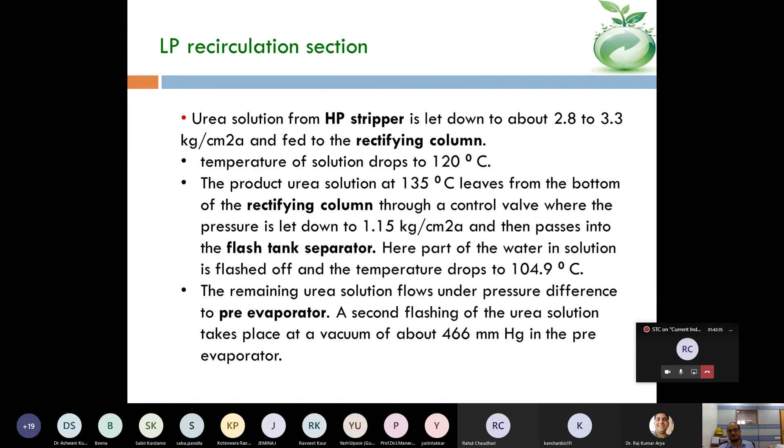Now it comes to the evaporation and prilling section. So for prilling of urea, we require approximately 99.5% concentration.

So there is a series of evaporation sections, in which we are heating up this solution, working under vacuum. In the first evaporator, it is around 532 mmHg, and in the secondary evaporator we are working at 690 and 710 mm Hg.

The main purpose of this section is to concentrate the urea solution, and the water evaporated from here goes to the condenser section, condensers and coolers, and that water is also useful for us. We do not send it directly from there. We get ammonia, CO2 and water, and that is sent into the hydrolyzer section. From there we get ammonia and CO2 again through stripping, and the water, which contains very little ammonia, around 5 ppm, is sent to the cooling tower makeup.

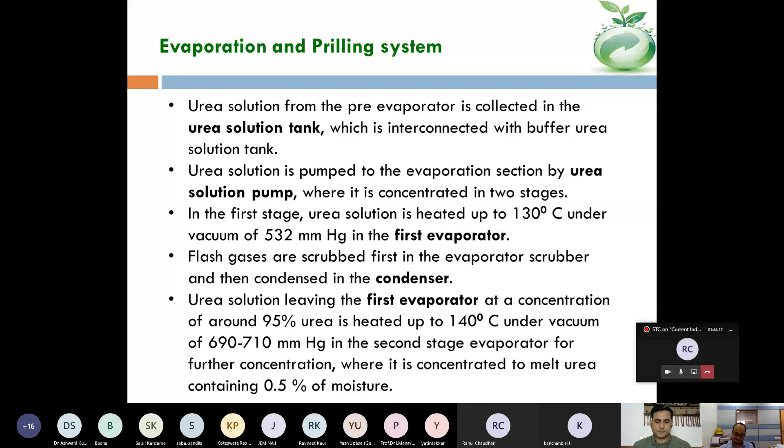So this is the evaporation section and the prilling section. Once the prilling is done, that means after the secondary evaporator, around 99.5% molten urea is sent into one tank, and from there it is pumped to the prilling tower. Our prilling tower height is around 71 meters. From the top of the 71 meter prill tower, it is spread by a rotating prill bucket.

This bucket has a perforated mesh, and from there the solution is converted into droplets. The air coming from the downside of the prill tower pulls through it, and crystallization occurs, forming the urea prill at the bottom of the prill tower.

Actually, can I ask something here? In the prilling tower, in case of the bucket, why don't we have something like a sparger type of thing? Actually, sir, first the flow is very high. And the other thing is the bucket is rotating at high speed, around 2100 RPM.

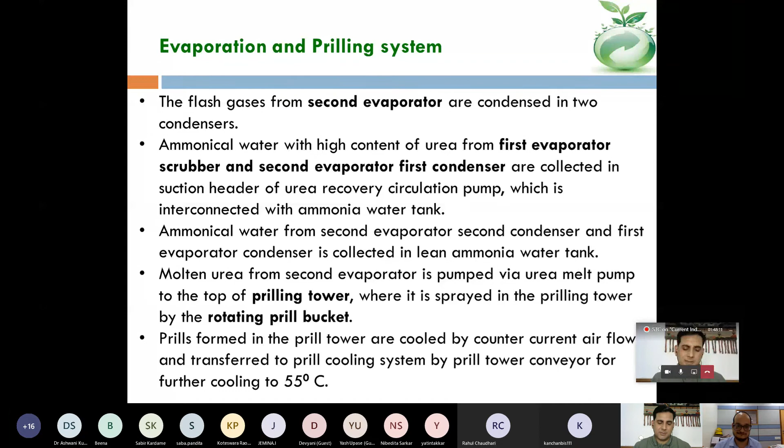So once we get the prill at the bottom of the prill tower, the temperature of the prill is around 100 to 80 degrees centigrade. Before going into the packaging unit, we have to bring this temperature down to around 50 to 60 degrees.

For this, there is a prill cooling system, which is a fluidized bed cooler with a perforated plate, where air coming from the downside cools the urea prills, and the cooled urea is sent to the product conveyor where it is coated by neem.

So some portion of the ammonia and some portion of the dust will go to the upper side, and that dust we are just recycling waste through cyclones, cyclone section.

How are you controlling the thickness of this neem coating on the urea, or are you not controlling it? Thickness we are not controlling. We are just analyzing the ppm level of that coating. You will see, you will not even feel like it is coated. Just we are putting it from the sparger, oiling it through the sparger and separators. So that coated urea would be yellowish in characteristic? Greenish yellow, very light greenish yellow.

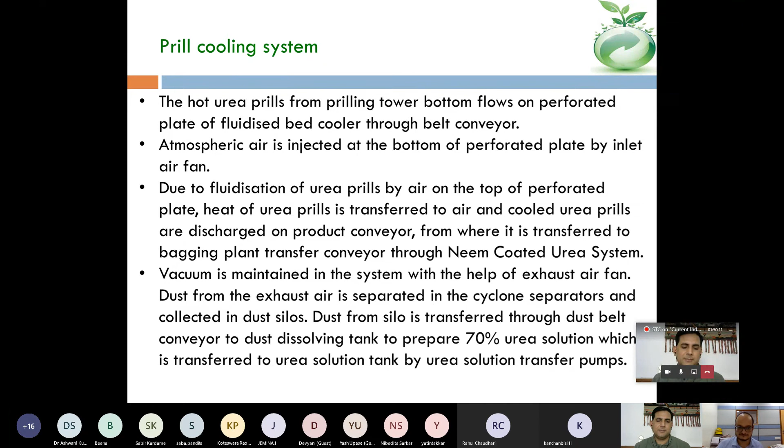The neem coated urea system is there for coating the urea. We have spray nozzles, and from the spray nozzles we are spraying the neem oil into the product conveyor only, and from there it is transferred to the bagging plant and silo, from the plant transfer conveyor where it is packaged.

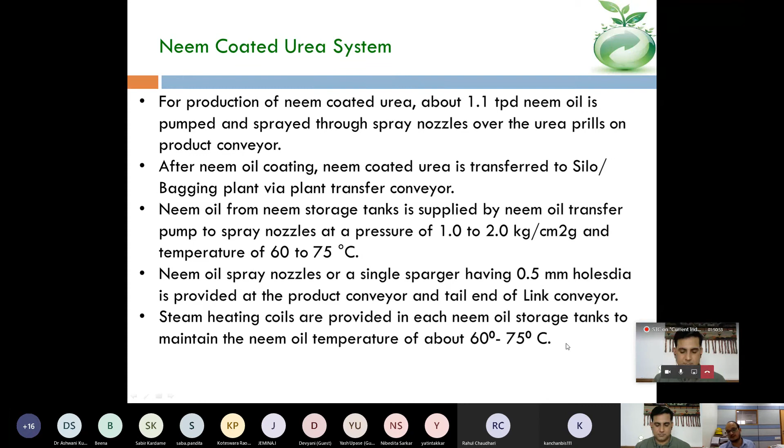Neem oil is also having tanks, and it also has steam coils so that the temperature will not go below 60 to 75 degrees centigrade.

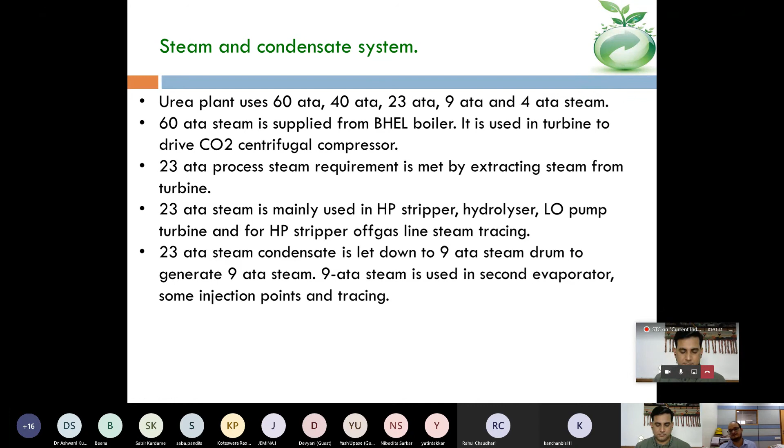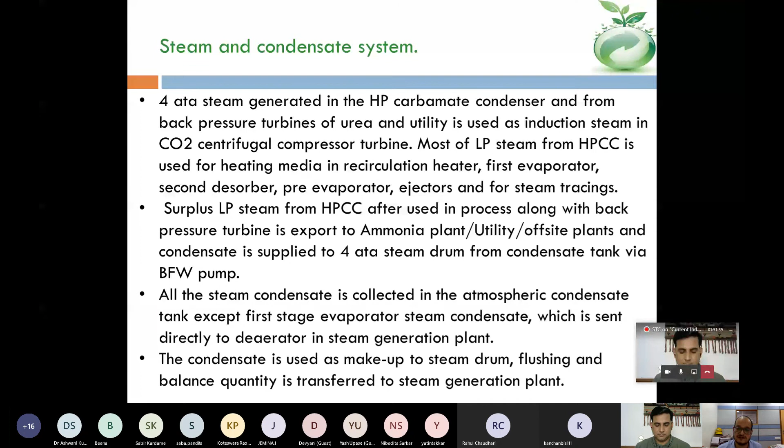Now there is a steam and condensate system also. We are utilizing steam at various stages, and based on the process requirement, we use that type of steam. 60 ata we utilize in the CO2 centrifugal compressor, 23 ata we utilize in the HP stripper hydrolyzer and stripper offgas line steam tracing, 23 ata let down, and 9 ata we utilize into the second evaporator. So it is various stages of the steam. 4 ata also we utilize in tracing, in the induction machine also, in the pre-evaporator and evaporator, wherever we can utilize the LP steam, to make our plant energy efficient.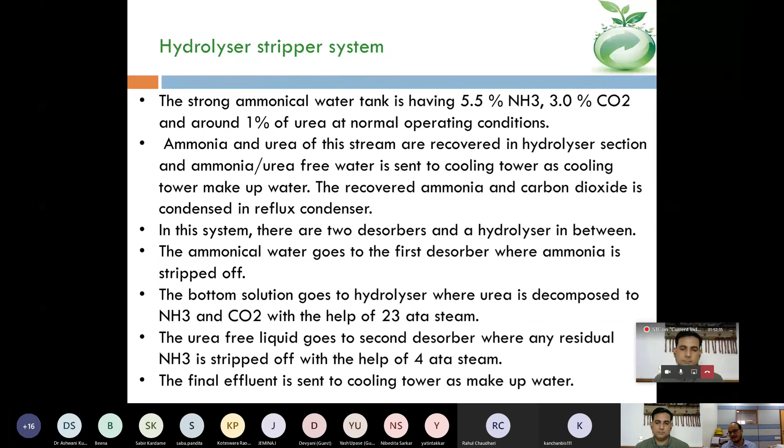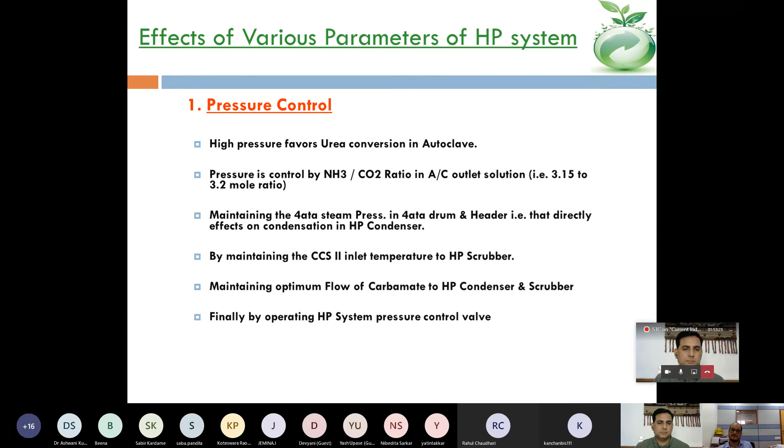So these are the various parameters in the HP section. As I already told you, HP pressure control, high pressure favors urea conversion, so we maintain high pressure. Even into the HP condenser, 4 ata steam pressure is also very crucial for us, because if we reduce the pressure, the saturation temperature will decrease, so we will not get that much effective boiling point, and more steam can be generated.

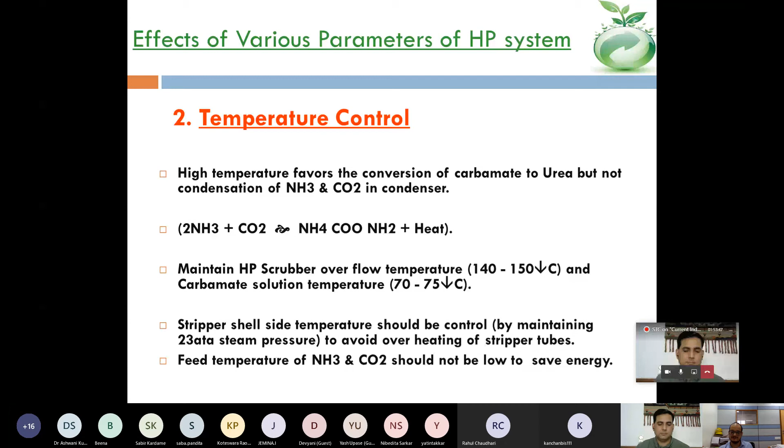Temperature control: we maintain HP scrubber overflow temperature at 140 to 150 degrees centigrade. Carbamate solution is around 75 degrees centigrade we have to maintain, but temperature control is everywhere. And feed temperature of NH3 and CO2 should not be too low, to save energy.

Now the azeotropic composition. We have seen in the LP section that azeotropic composition is from ammonia and CO2. Whenever there is a distillation process, the azeotropic composition is such that at that temperature, the boiling temperature of both elements is the same for that composition. So sometimes it is beneficial for us, as ammonia and CO2 come out from the process at the same time and make the carbamate. In the LP section we are utilizing this kind of composition.

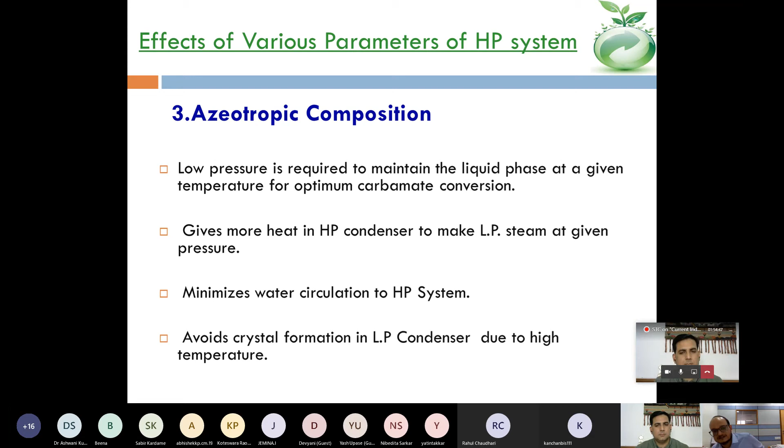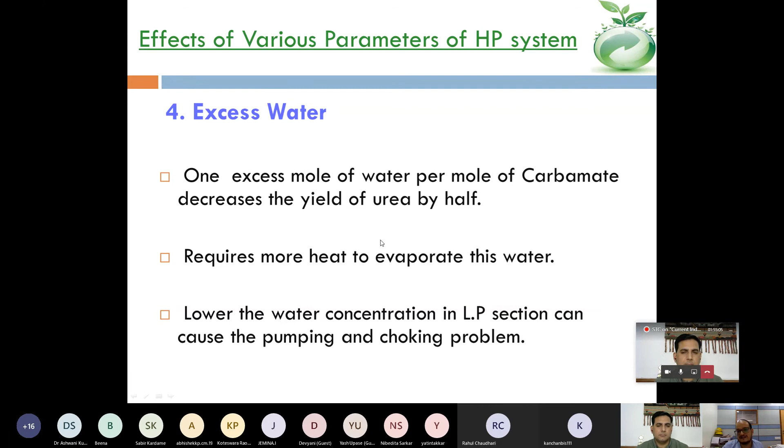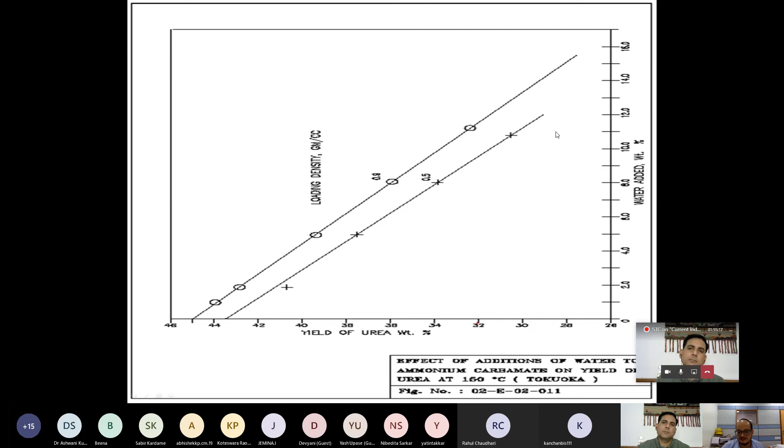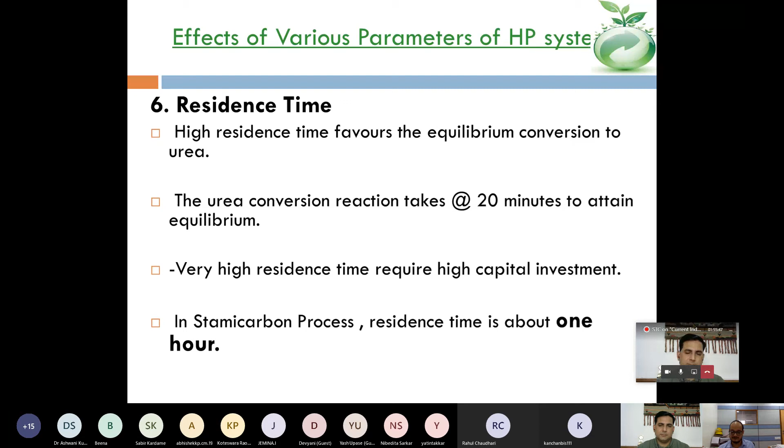Flow, yes, flow will be related to residence time of course. The reaction takes 20 minutes, but in our autoclave it takes 1 hour to attain that, because it varies from reactor to reactor also. High residence time favors equilibrium conversion, but we cannot go for more time, because if you increase the time, it will increase the biuret formation also.

Levels are also very important because they are everywhere - in scrubber, autoclave, HP stripper. Levels play a very big role.

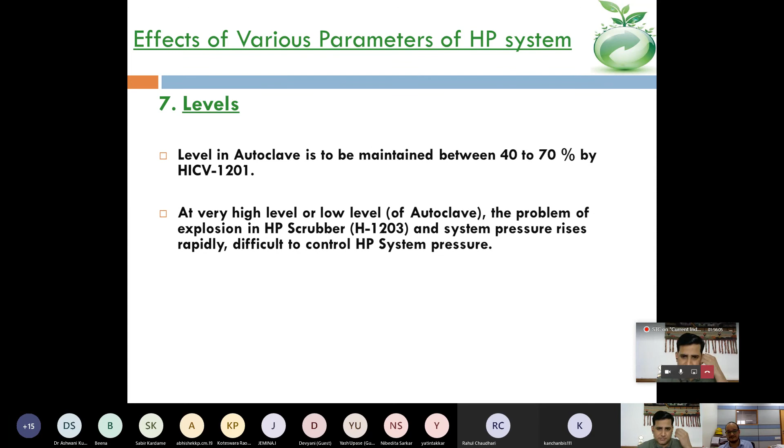Safety, yes, I already told you - hydrogen, oxygen, ammonia. We already have so many hazardous processes and streams. So we have to maintain safety. Safety is there, and 150 kg pressure is there.

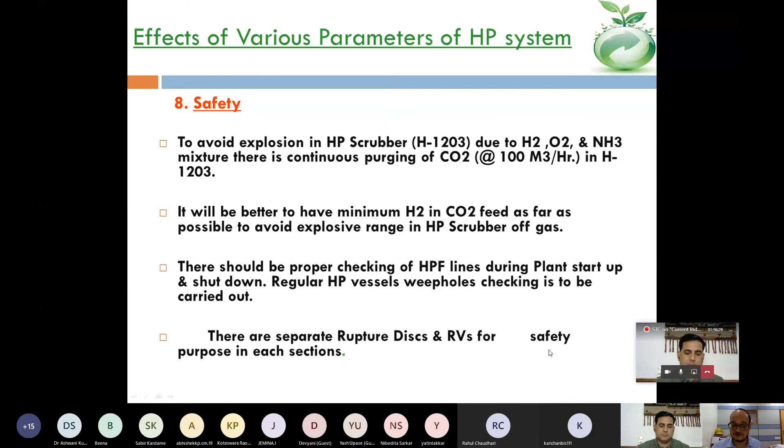So rupture disc and RV are there for safety purpose in each and every section. Biuret formation is there - 2 moles of urea and heat. As I already told you, if the temperature is high, biuret formation will be more. So with increased temperature, urea percentage and high residence time, it increases.

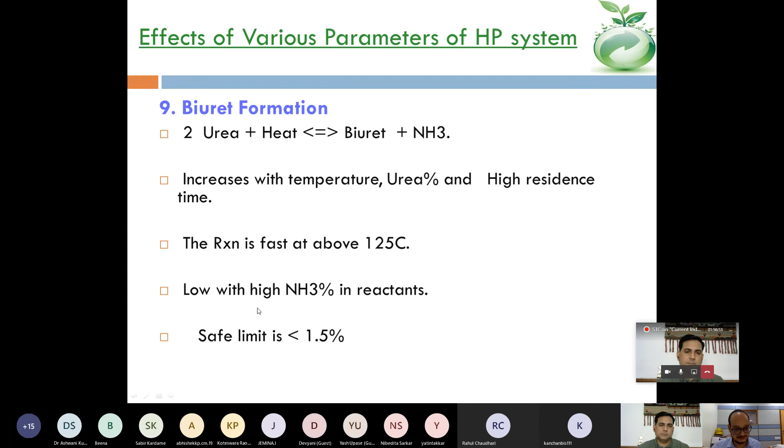Reaction is fast above 125 degrees centigrade and low with high ammonia in reactant. Safe limit for us is 1.5.

So now overall we can see this is our process diagram in which air, natural gas and steam we are inserting into the ammonia plant. There we are getting ammonia, and surplus ammonia we are sending into the ammonia storage tank. And carbon dioxide and ammonia we are sending into the urea plant, and we are getting urea from there. We have also put DEF here, because from the urea plant we can produce DEF also.

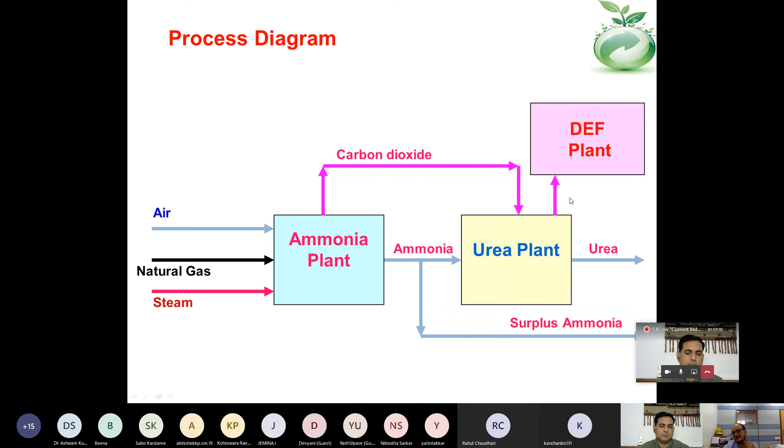So this is the overall picture. At a very small level we can understand that air and natural gas are introduced in the reforming section, in which CO, hydrogen and CO2 are formed, then it goes to the shift converter, then to CO2 removal. CO2 goes to the stripper, and other gases go to the methanator, into the synthesis gas, then into the refrigeration section, and from the refrigeration section ammonia goes to storage.

This also goes to the HPCC and reactor. From there, from the reactor - that means autoclave - the urea comes, and in the HP stripper the percentage is around 50%, and in the LP and evaporation section it is around

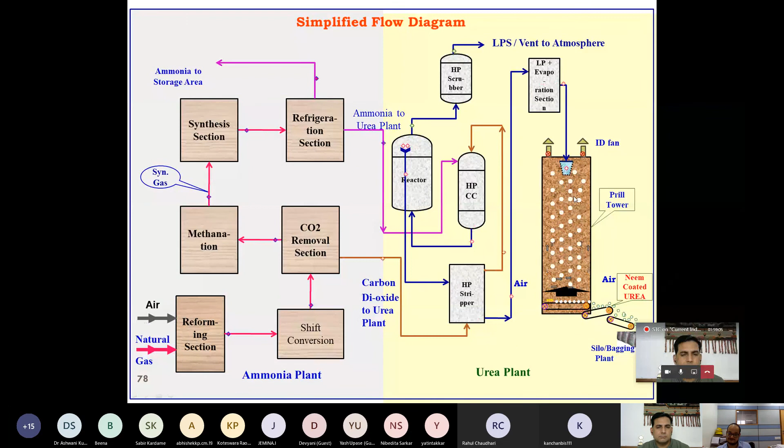99.5%. There is a bucket, as I already told you, sir - the air is going here, there is an ID fan. So the bucket is here and the umbrella is formed here. The better the umbrella, the better we can utilize this area. If the umbrella is not very good, then the air circulation, air can escape without cooling the prills. And the other is PCS and those things.

So now I will come to the major concerns - the major concerns in the current status.

For the fertilizer section, it is always about government policy, because without government permission we cannot sell out urea. All dispatch of urea goes to the Ministry of Fertilizer, and we have to send direct production data of urea to the Ministry of Fertilizer site on a daily basis.

Pending subsidy is also an issue for us, because as you know the cost of manufacturing urea is very high in production, but we are not getting that much amount from the farmers. So the government is giving subsidy for the difference of that amount.

So are farmers the only consumers of urea, or does it also have some industrial applications? For industrial utilization, they have to procure it at market price. That cannot be directly taken from the subsidized price.

No, that is a different part. I mean to say, you were saying that you are not getting the right price for urea due to the subsidy. That's fine, but urea may have other commercial applications, so that cost may be recovered from consumers. That's why I am telling you it's all about government policy. Government cannot allow direct selling into the open market.